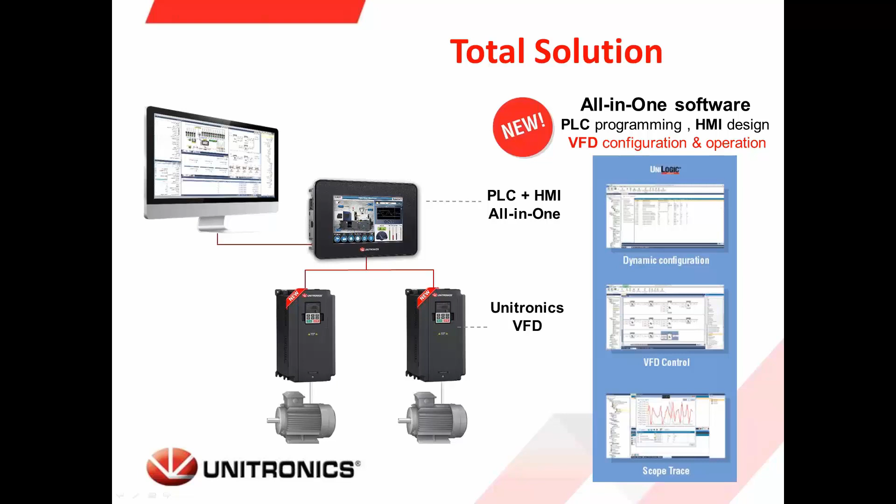In one software environment, we can now program the control code, let's say the ladder diagram, design the HMI screen, and configure and control the VFDs. As we can see in the picture, with UniLogic, for example, we can program the UniStream to configure the Unitronics VFDs and of course control the VFDs, which will probably be connected to motors, pumps, and so on.

Some features of our VFDs. First of all, as I mentioned, you will see later in this webinar how easy they are to program and simple to use. They have built-in EMC filters. Every place you see the asterisk, it is model dependent. We have several mounting options like wall, flange, and DIN rail. The temperature environment can range between -10 to +50, supporting Modbus RTU.

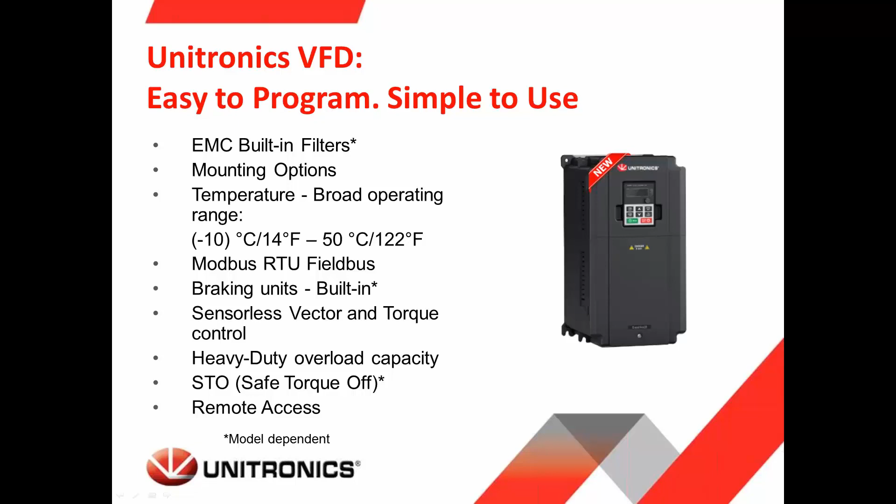Braking units are built in. Of course, as you know, we are not using the VFD for emergency stop. In case you need an emergency stop, you will have to install a mechanical brake. Supporting sensorless vector and torque control. We have a heavy-duty overload capacity; we'll see it in a moment in the specifications. STO, safe torque off, and even remote access via our UniLogic and VNC to the PLC, which will of course be connected to the VFD.

Let's see the specifications. You can see that we have several models. UMI, by the way, is for Unitronics Motion Inverters. We have the B1EU, B1UL, and B5UL. You will see in a moment the certifications for CE, TÜV SÜD, and also for the US market, UL. You can see here the input voltage, supporting different types of input voltage with single phase and three phase. Input frequency 50 to 60.

For the B1 models, the supported motors will be three-phase asynchronous induction motors. The B5 model also supports permanent magnet synchronous motors. The output frequency will be 0 to 400 Hertz. The overload capacity, as we discussed before, can be up to 60 seconds at 150%, up to 10 seconds at 180%, and 1 second at 200%.

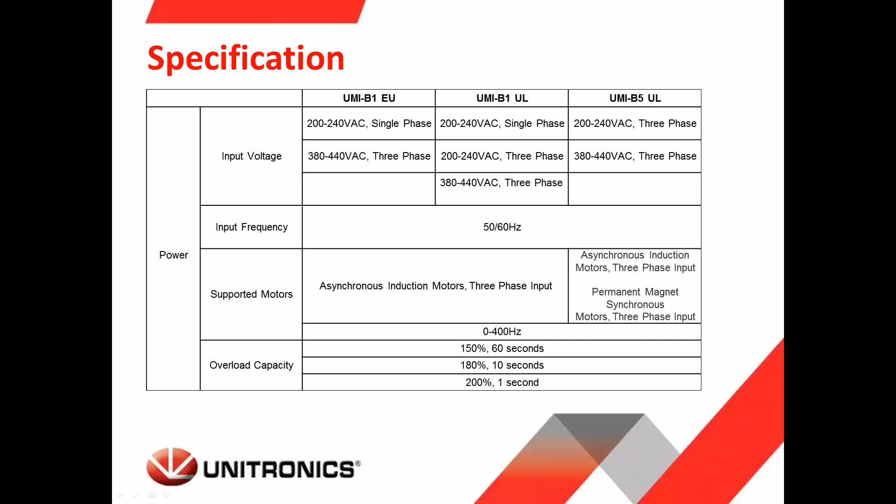Under control, as we mentioned before, we're supporting space vector PWM and sensorless vector. We can control the VFD via Modbus, analog input or digital input, PID, and even high-speed input. The communication will be over Modbus RTU 485. For the number of inputs and outputs, under analog inputs, depending again on the model, we support 0 to 10 volts or 0 to 20 milliamperes, and digital inputs support 4 or 8 normal digital inputs and 1 high speed.

Also supporting analog outputs, digital outputs, and relay outputs. For analog we again have 0 to 10 volts and 0 to 20 milliamperes depending on model. For digital outputs, in the B1 model we have 1 transistor output, and in the B5 we have 2 transistors, one of which is high speed up to 50 kilohertz. Also supporting relays, again the amount of relays depending on the model.

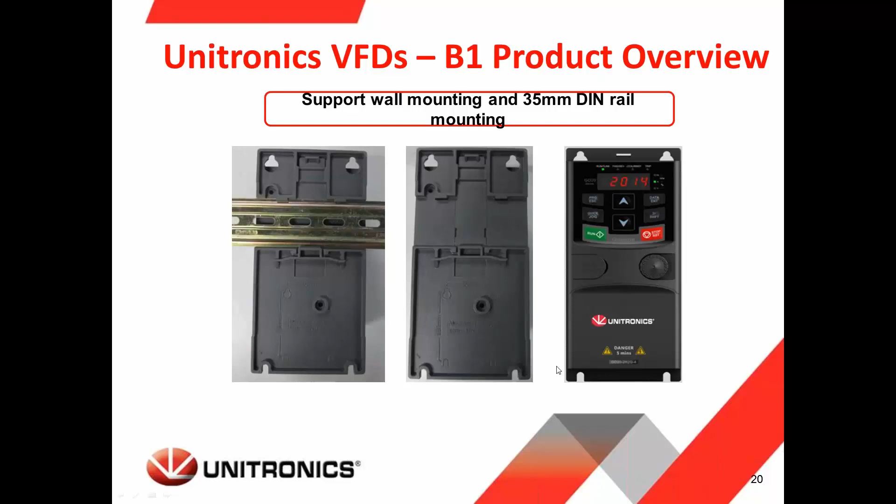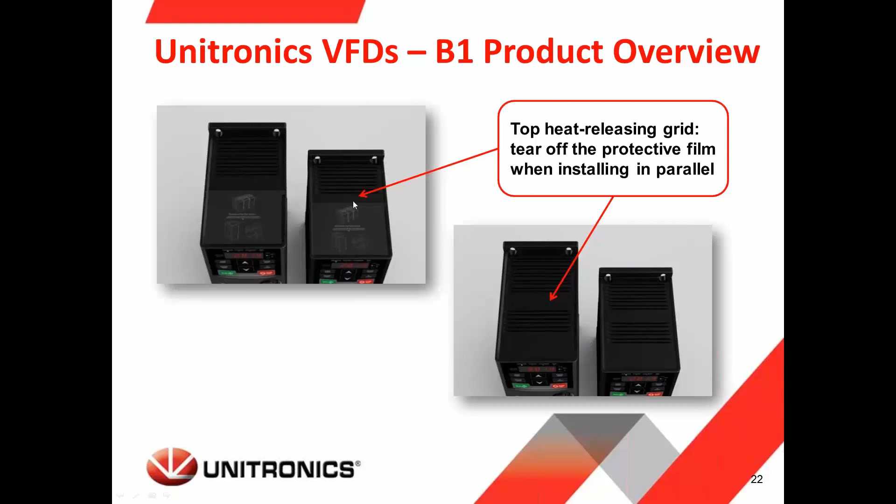And here we have the upper cover, which is dual layer, to expose the terminal blocks for connecting digital, analog, and so on, and also connecting the power and the motor. We support, as we mentioned, wall mounting or DIN rail, as you can see in these examples. You can also connect them on a DIN rail, one after the other. In case of installing one next to the other, there is an option to tear off the protective film for ventilation. And also here we have the option for the bottom heat releasing grid.

In terms of accessories, we support an external keypad, as we mentioned, flange mounting, braking resistors, filters for C3 and C2, and dam-board for side heat releasing holes.

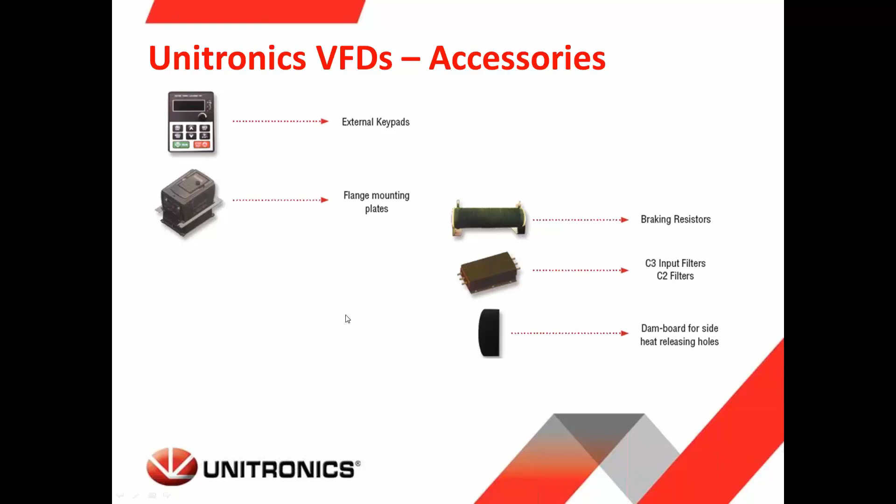In general, regarding safety, when you take the VFD out of the box, one must read all the safety precautions. I just want to mention that the VFD is the first Unitronics product that involves the high voltage grid. It is also mentioned in the manual that after turning off the VFD, you still cannot touch the power area. It's very dangerous because the VFD has DC capacitors, which take at least 5 minutes to discharge. And like I mentioned before, the inverter cannot be used as an emergency stop device. We must install a mechanical brake.

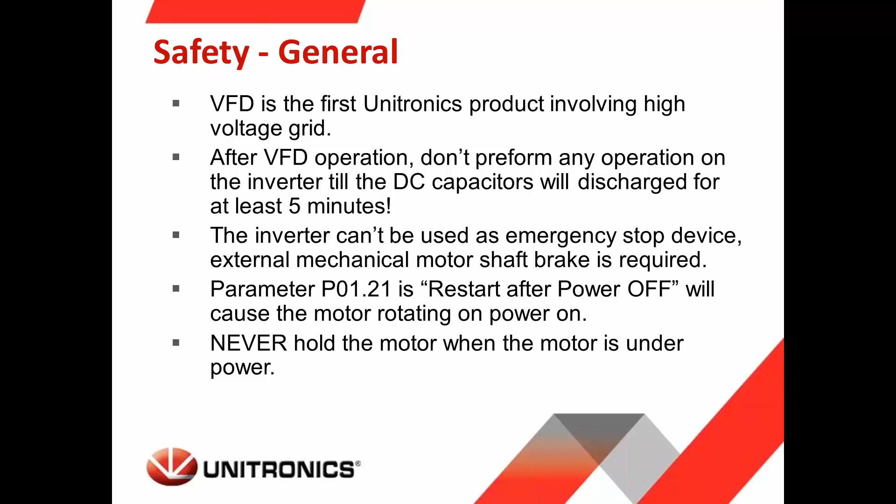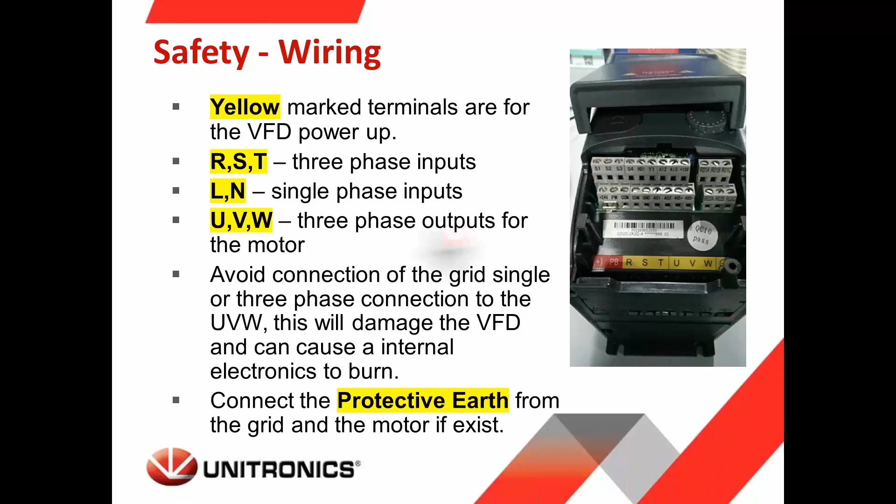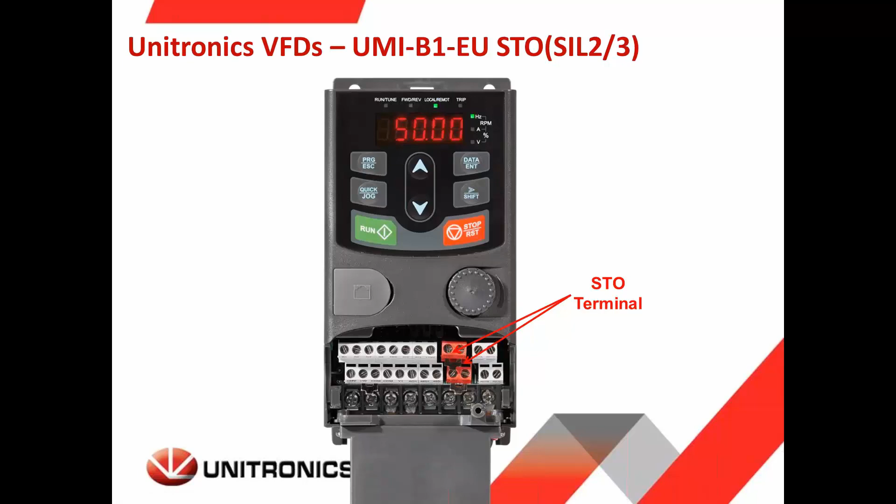We can see it also here in the diagram. Okay, and of course the STO is mostly used for safety. It helps to prevent unexpected start of the motor and also to cut the drive signal in cases where a human is working next to the motion devices. And let's say when he is crossing some area, we want, of course, to stop the motor immediately. So this is the purpose of the STO, which is SIL 2 and 3.

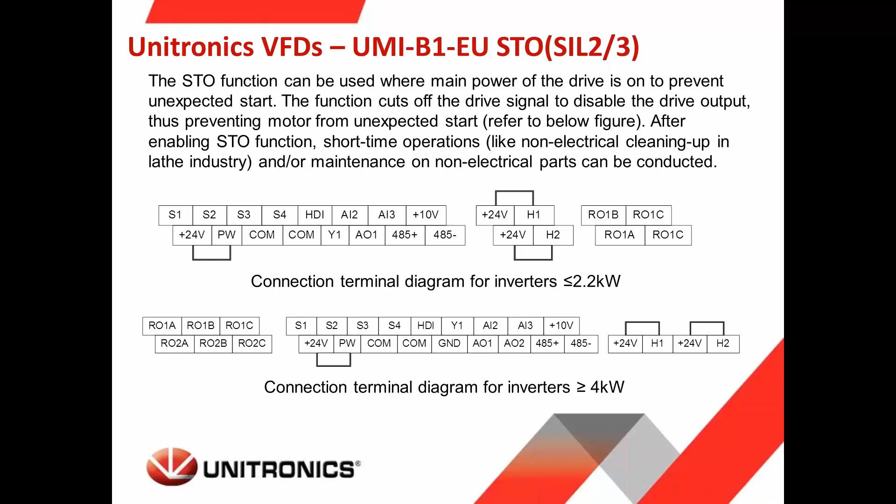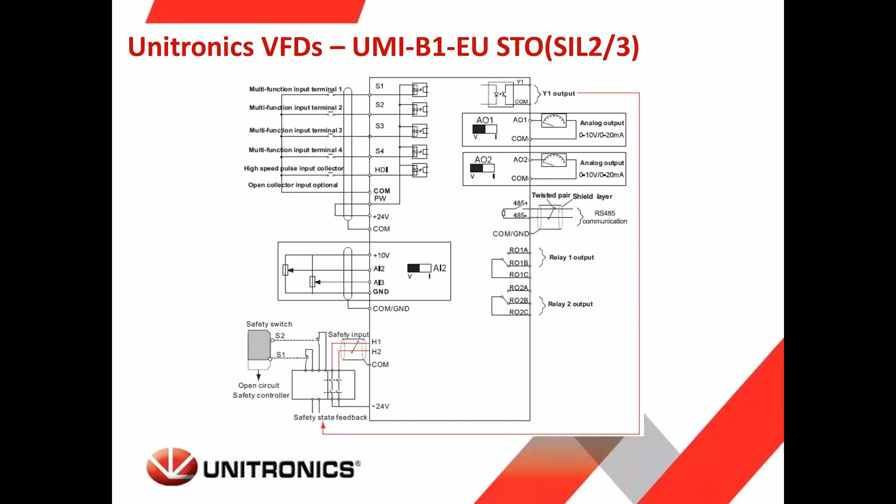Here we can see in the diagram how to connect the safe torque off. Of course, all these diagrams and pictures were taken from the manual, and on our website under the new VFD page you can find all this information.

If we are talking about operating using the keypad, here using the program and escape key we can select the program number, and using the enter key we can change the parameters using the up and down arrows, and also using the shift we can move between the digits when we want to change the higher numbers of the parameters. Run and stop if we are going to control the VFD from the keypad, and also an option for jogging via the keypad.

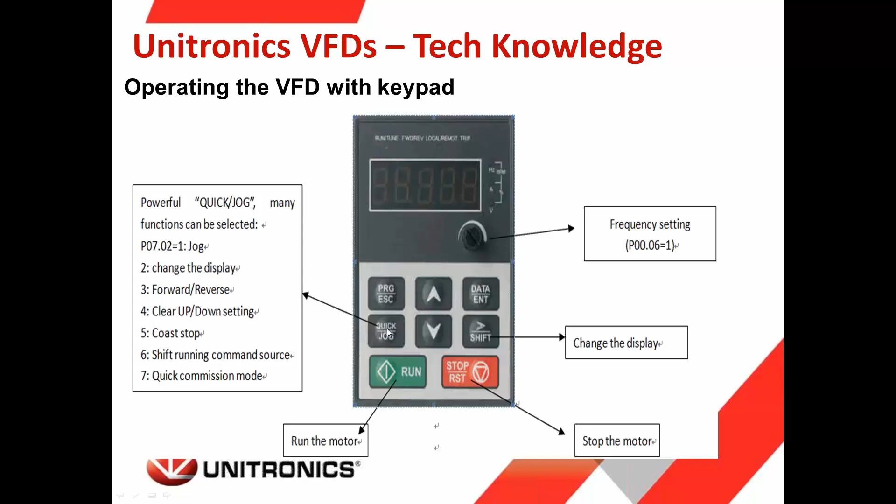Now in the next slide we'll see several examples for configuration. In general, as you know, when you are using a VFD, the first thing you need to do is to configure the motor parameters. The motor parameters will be in group number 2. You can see that the parameters are split into group and index.

Okay, so let's say this is group number 2, and here we need to configure the motor power, frequency, speed, voltage, and current. As you know, on the motors you will have a plate, and on the plate you can find all these 5 parameters, and you need to set them in order for the inverter to move the motor with the best performance.

And here these 2 parameters: 0001 is the run command source. The source of the run command, meaning to start the drive, can be from the keypad, it can be from the terminal, from the digital inputs, and it can be also by communication via Modbus.

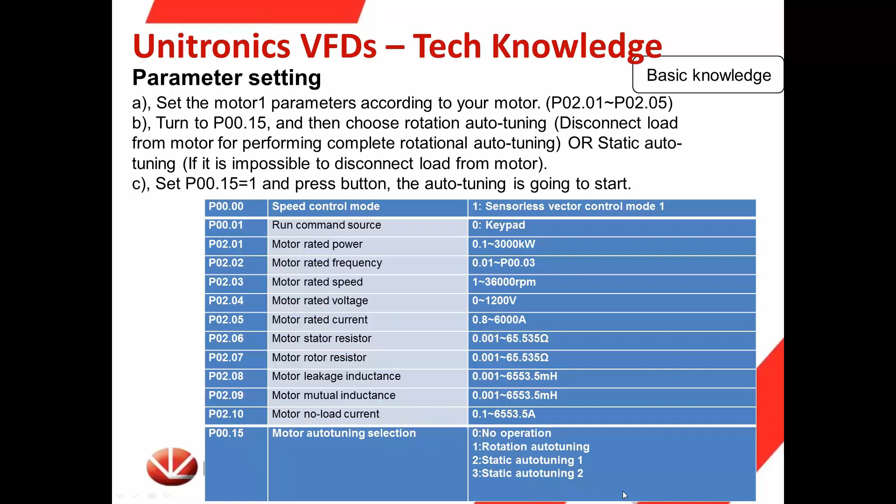We can see here in parameter 0015 we can activate the auto tune. There are 2 types, actually 3 types of auto tuning. The first one is called rotation. Rotation auto tune means that we are performing auto tune when the motor is not connected to the load, which is recommended. If we are not able to disconnect the load from the motor, we will use the option for static auto tuning.

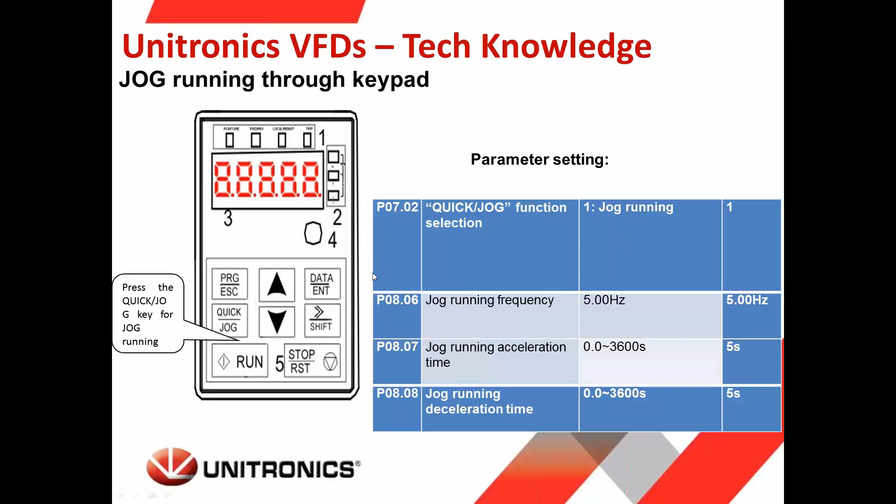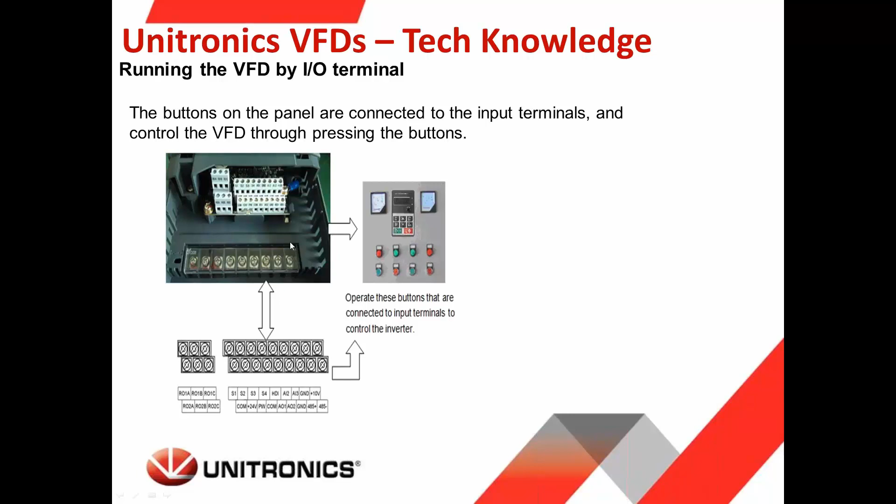Here we can see again just an example of the terminal, if we want to control the VFD via the terminal block, via the inputs, for example the digital and analog inputs. This is an example of 2-wire control mode to control the VFD via digital inputs. So we can see here that we can configure S1, which is the terminal for input number 1.

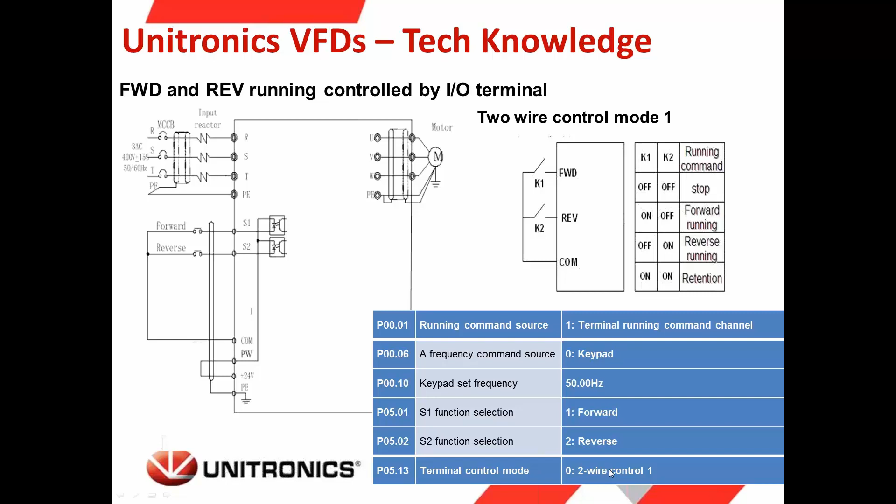We can configure it to perform forward, so that means that when I apply 24 volts or 0, depending on PNP and NPN, on this input, the motor will start running forward, and I can do the same for S2, which is terminal number 2, for reverse, and the mode, which will be if I want to use 2-wire control, and then I can use this method.

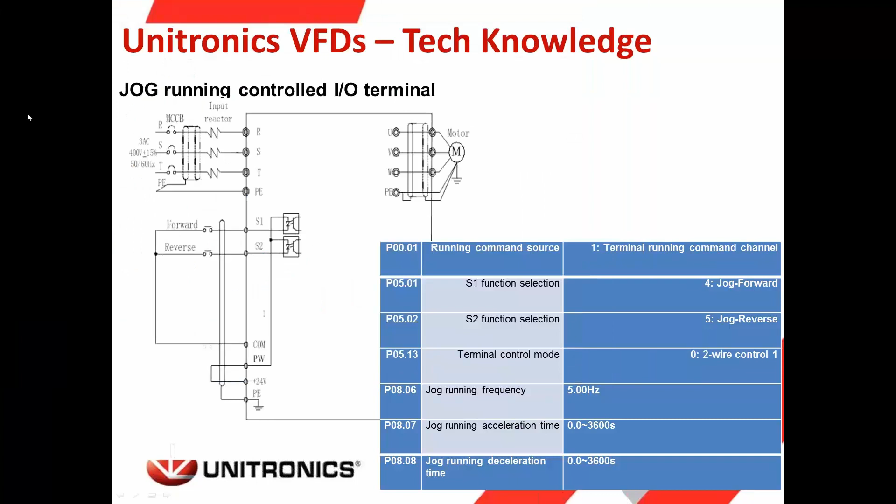You can see also jogging via the I/O terminal. So again, you can configure S1, this time to perform the jogging. I can just show you in the user manual, you can see here, this is how to configure the digital inputs, for example.

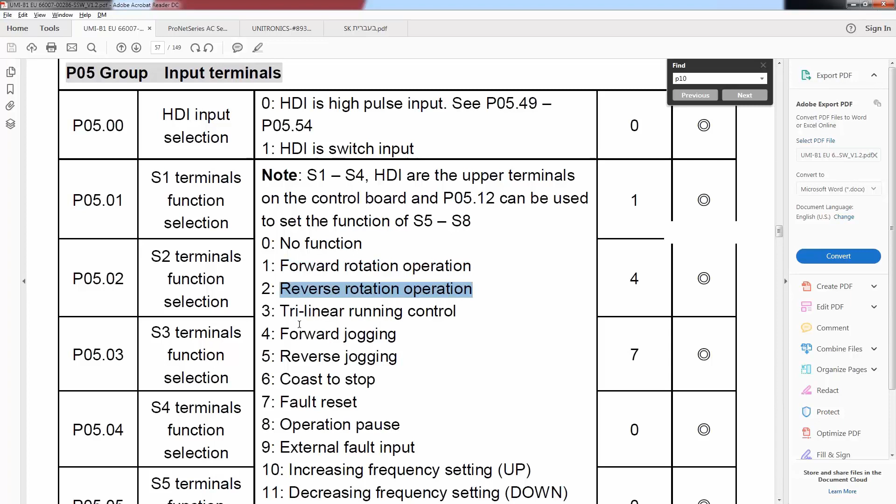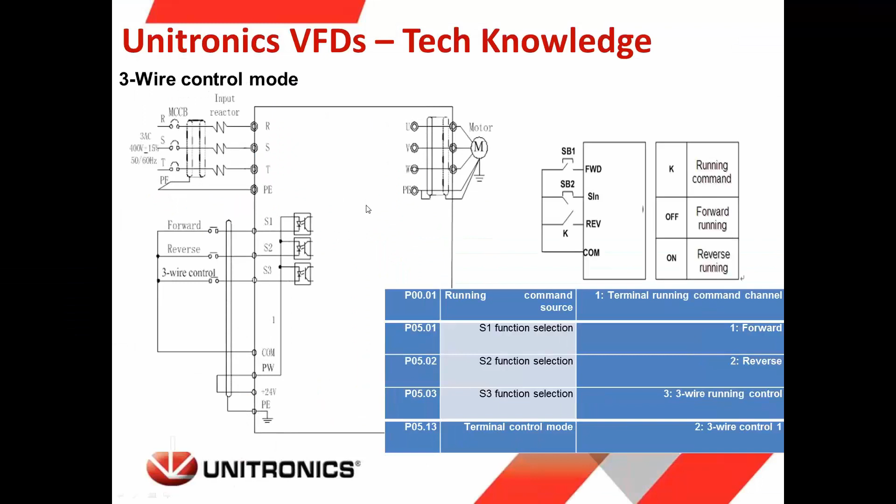So you see number 1 is forward, number 2 is reverse, and so on, jogging, fault reset, and you have here many options for configuring what each one of the inputs will do. Again, this depends on the application. Of course, everything can also be done by communication if you don't want to use the terminal. This is another option, a 3-wire control mode.

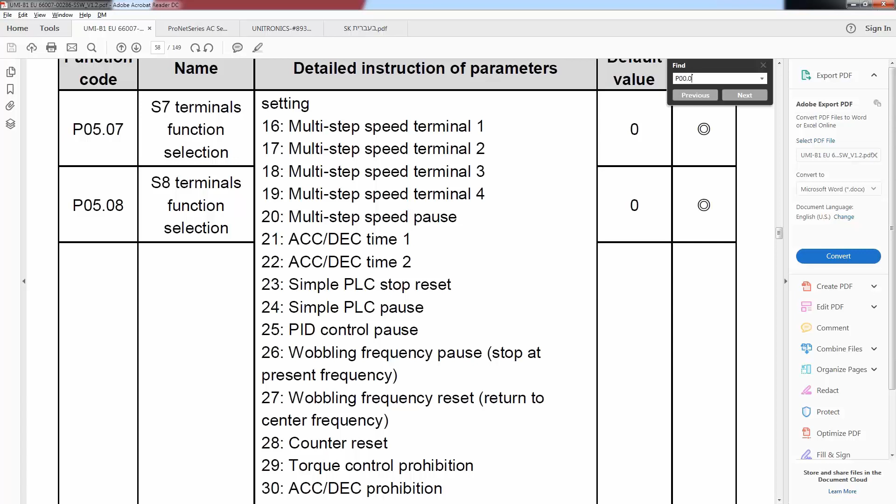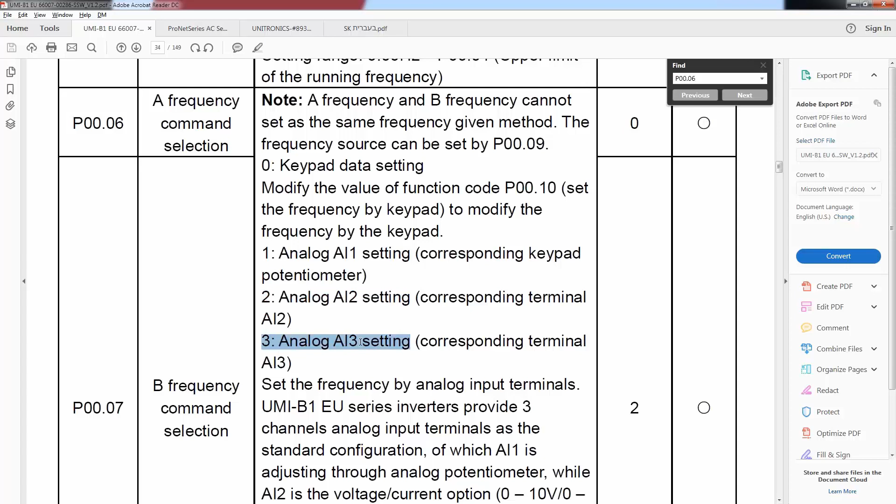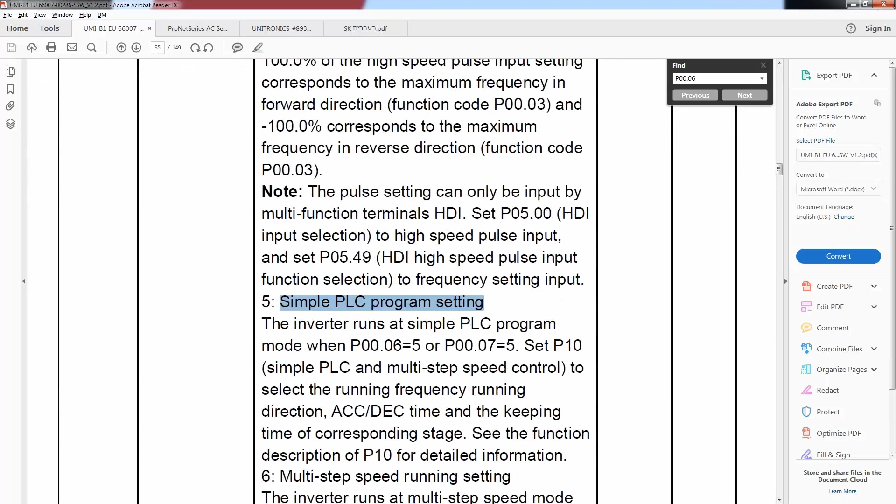Again, if I go back to the manual, to parameter 006, you can see here, this is the definition. 1 is analog input number 1, which is the potentiometer, 2 means analog input number 2, 3 number 3, 4 is the high speed, 5 is a simple PLC program if you want to do it by the digital inputs, 6 is the multi-step speed, and so on. So there are several ways to set what will be the source of the frequency.

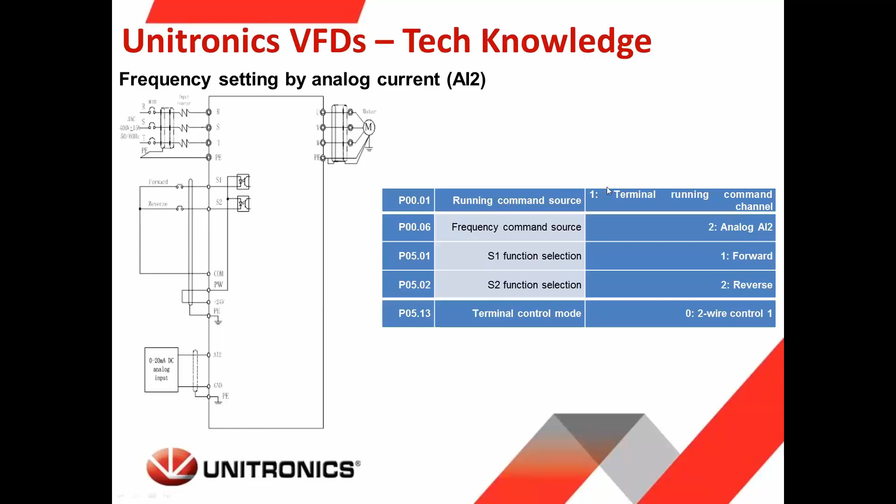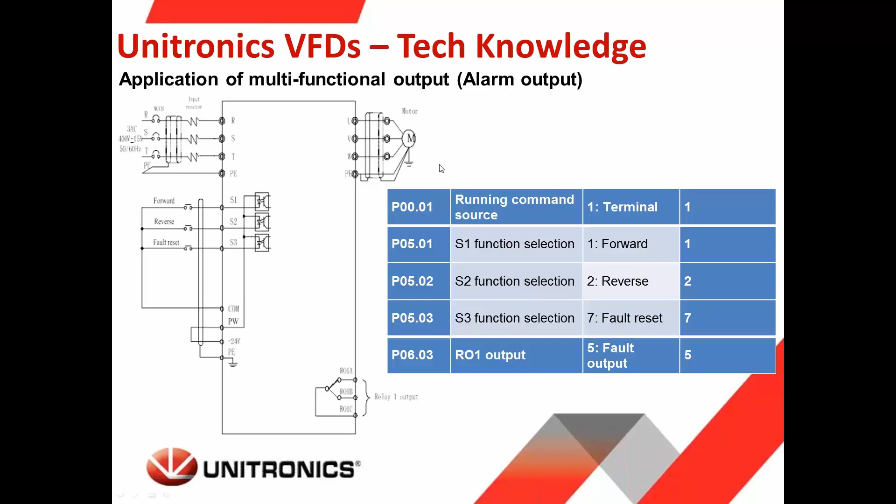In the PDF, in the user manual, you can also find all the fault diagnostics. So in case the VFD goes into fault, you can see here the fault code, which will appear on the screen of the VFD, and we can find what is the possible cause and what can be the solutions. Okay, so these are the fault diagnostics.

And so this is an addition from Unitronics to allow OEMs to simplify and centralize their control needs, relying on fewer components from fewer vendors. They now can save time, budget, and efforts with this all-in-one approach. As you will see in a moment when we review the software, everything can be programmed in one environment. So let's now jump directly to UniLogic.

Okay, so I just opened a new application. In a moment I will also open some example applications. We already published in our support portal examples and some information about the VFDs. Also, as I mentioned, on the website you can find the user manuals and all the marketing information.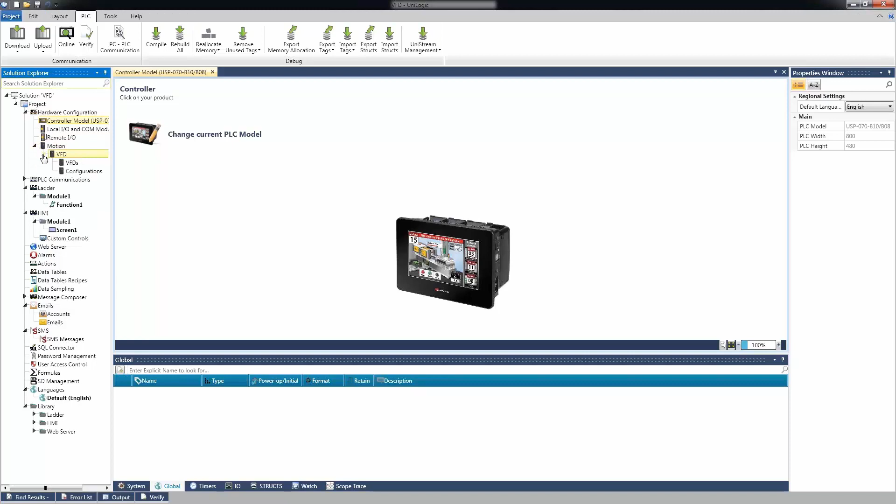Now, when we open a new application in UniLogic, we have a new section under the hardware configuration, which is called Motion. Under Motion, we have VFD, and here you can find VFDs and configuration. So first of all, when I go to VFDs, here in the toolbox I can find the families. So let's say I will take this one. Again, on the VFD you will have a sticker with the model. By double click or by drag and drop, we can add the VFDs.

The communication channel in our PLCs will be the port on the CPU, or if we are referring to UniStream 5, it will be one of the RS485 ports that you install. So in communication channel, we have to define where the VFD will be connected. I will go first to PLC communication, physical, serial COM. And under the serial COM here, I will first check the VFD.

By default, the baud rate is 19200, 8, even, 1. This is because when you take the VFD out of the box, these are the default settings. If you want to change it, of course, you can change it via program number 14 in the VFD. So you can select here the baud rate, parity, data bits, and so on according to what you configured in the VFD.

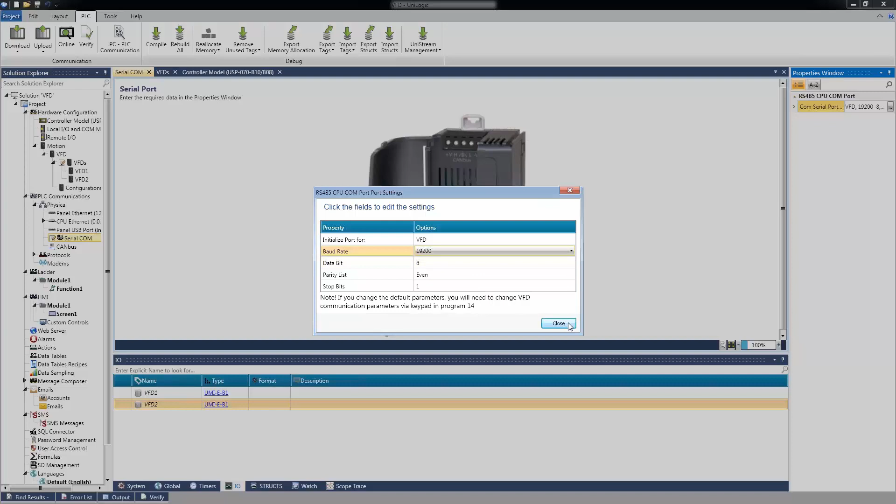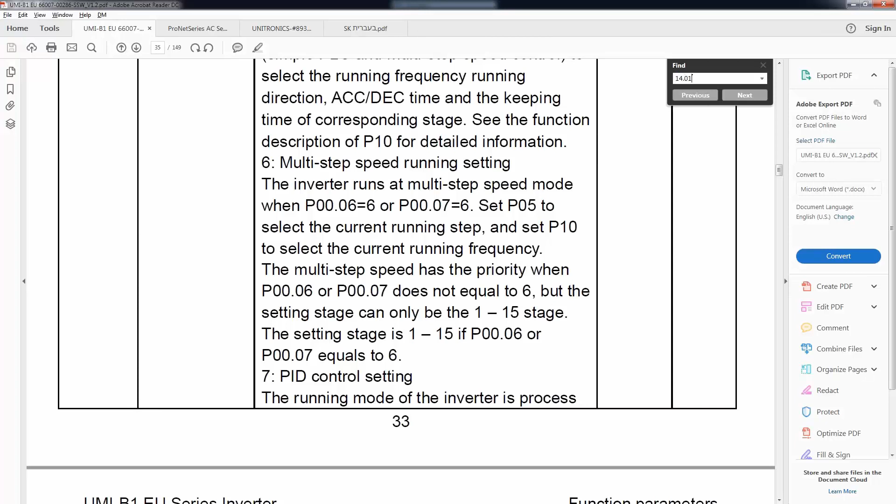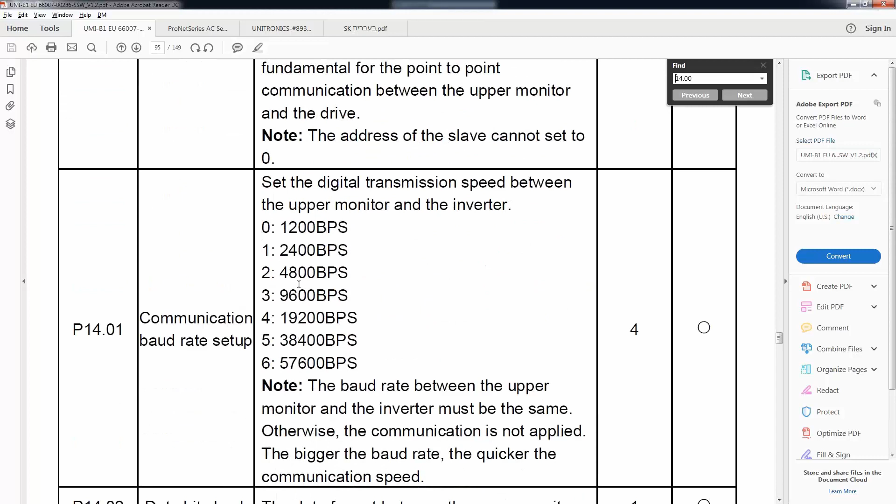Now if I'm back here, I can select the communication channel for each one of the VFDs. Here we can set the Modbus ID. Of course, the Modbus ID can be determined also in the VFD, I can just really quickly show you. If we go to program number 14, in 14.0 this is the slave ID, 14.1 the baud rate, 14.2 the parity, and so on. Start bit, stop bit, and so on.

Okay, so once we configure the VFDs, the next stage is to create the configuration. So we go to the configuration, and here we need to pick the model. In my case, I will pick, for example, the 1.5 kilowatt model, again by double click or by drag and drop. So we can see here the model, and here the configuration. Here we can determine the configuration of the VFD.

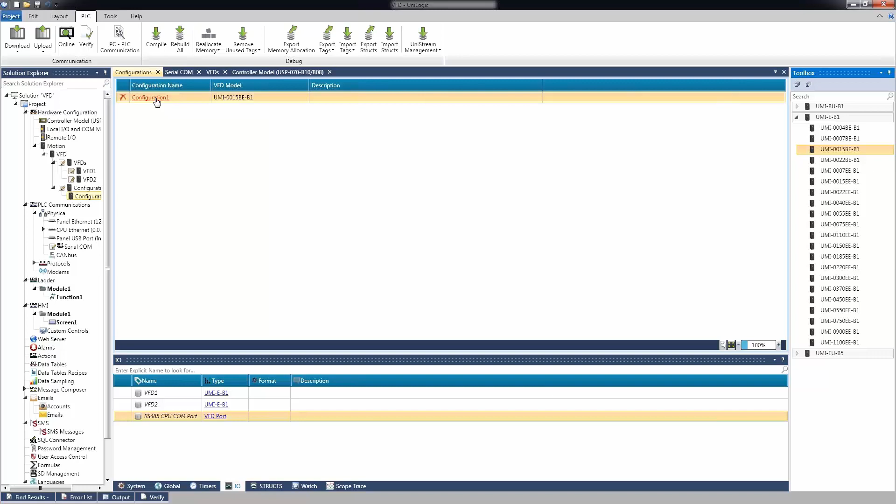So if I click on it, I will get this grid. Let's take a look at the grid. You can find in the grid the function code, same as it appears in the keypad, the name, and the configured value. Here we can determine the value that we want to configure for each one of the parameters, minimum and maximum, the default value, and of course units.

Here on the left, you can see all the groups. We added, for your convenience, two groups which are called Fast and Modified. Let's see what they mean. In Fast, we collected the most common parameters which are used, including, for example, the speed control mode, the run control mode, the frequency, maximum frequency, upper and lower limit, acceleration, deceleration, jogging, and so on.

Then later on, if you go to each one of the groups, you can define here, let's just take an example. Let's say I want to configure my speed control mode to V/F control. I want the run command channel to be by communication, and let's say the maximum frequency will be 60, for example. Each parameter that I'm going to change will appear immediately under the modified parameters.

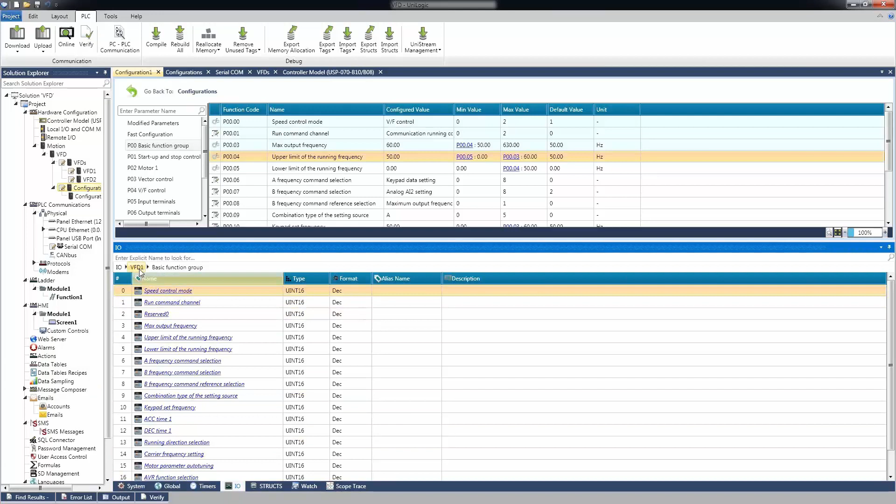We can see the line and model, and we have all the rest of the parameters as arrays inside the struct. For example, you can see the basic function group here. We can also find everything here under the array. The speed control mode, so we can see everything here also inside this struct.

Now let's take a look at the ladder elements that we have to control and configure the VFD. We can find the ladder elements here under COM VFD. Here are the elements. Let's say we want to load the configuration to the VFD, the configuration that we made in the grid. We have two options to do it.

If we want just to download the modified parameters, we will take this option, VFD Write Modified, and the input will be which inverter I want to download the configuration to. Let's say in this case I will select VFD1. And the configuration name is Configuration 1. It can also come from a tag, or I can just write here Configuration 1.

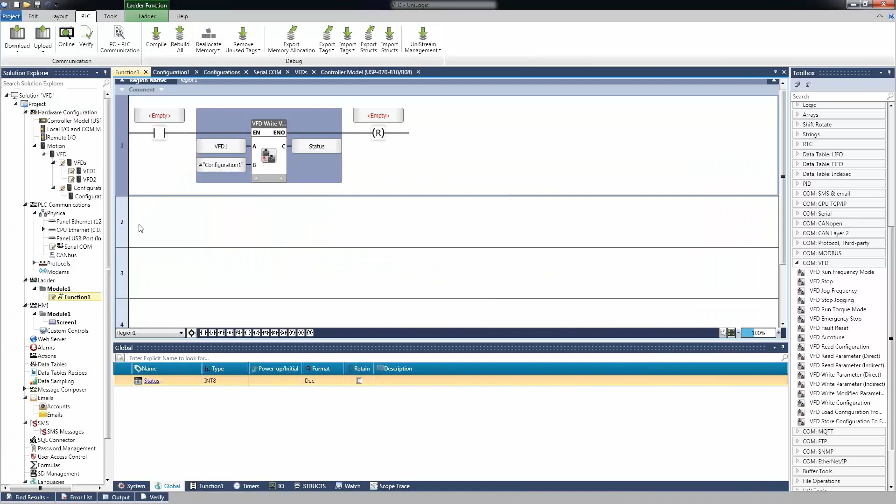And this is just a status. You can see here all the statuses, whether it was successful, and if not, what the problem is. This is how to write all the modified parameters that we configured here in the grid. Only these ones will be downloaded to the VFD.

Because let's say someone made some change in the keypad and you don't want to overwrite the configuration that was done from the keypad, you just want to download the modified ones, you can do it via this block. If you want to download everything, the whole configuration, including even the parameters that you didn't change, then this can be done in two steps. So let's see how it's done.

Okay, so first what we need to do is use the load configuration. When we download the application to the PLC, the configuration is downloaded as a file into the flash memory of the PLC. No, not to the SD, but to the internal memory of the PLC. And first we need to load the file into the struct. You can see here these are all the parameters, so it will be loaded to the struct.

So again, I just need to select the VFD, the file name, so I can, let's say, do the same here. And again, status.

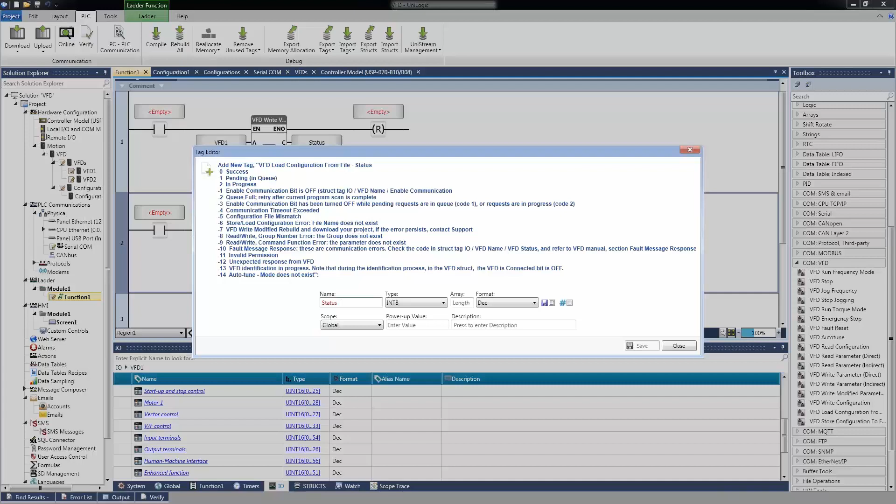Once we loaded the file into the struct, now we want to write it to the VFD. So in this case, we need to activate the write configuration. We have here the option write configuration. So we just pick the VFD and that's it. Since we loaded the configuration for the VFD1 struct, writing the configuration will basically write all the data inside the struct into the VFD by Modbus communication, of course.

Okay, let's see other blocks. Let's say that right now I want to read the configuration from the VFD. I just need to select which VFD I'm reading. Once I perform this read, all the data will be inside the struct. So let's say you configured everything from the keypad, but you want to read it into the PLC and see what the parameters are. You can activate the read and see them in the grid.

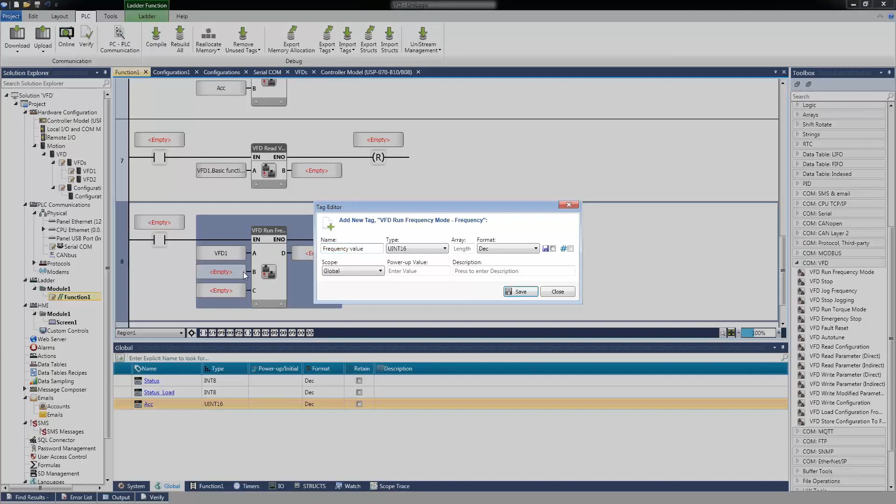For example, I can say here frequency value. So here you can set the frequency. By the way, the frequency is in hundredths of hertz, so for 100 hertz, it will be 10,000. Input C is the direction, 0 for forward and 1 for reverse. Again, it can come from a tag. Let's say I want always to move forward. D will be status. So this block is for running the VFD.

Let's take a look at the next one, which is stop. Very simple, just a block, select the VFD you want to stop, and that's it. We have several types of stop. This stop, of course, stops according to the deceleration. And we have the stop emergency, which will immediately disconnect the signal to the motor. But as I mentioned, because of inertia, the motor will probably rotate a little bit more. If you want to stop immediately, you'll have to use a mechanical brake.

Let's see some more options. So we have here the fault reset. In case the drive goes into fault due to over voltage, over current, many kinds of faults, you will not be able to run the drive until you reset the fault. So this is the block to reset the fault. The only input is just to select which drive I want to reset the fault.

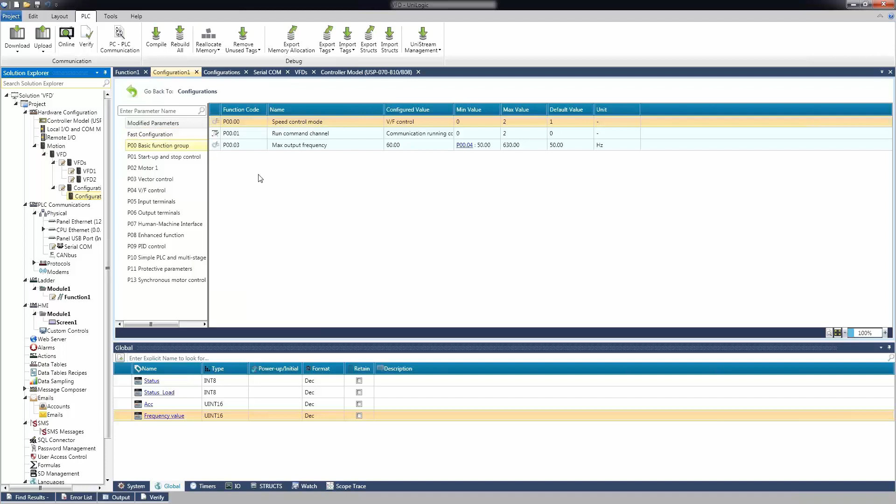I think here under the fast configuration, you can see you can configure the jogging run frequency, the acceleration, and deceleration. So once you activate the block to start jogging, it will jog according to the frequency, acceleration, deceleration determined in the configuration. And of course, the next one will be the stop jog, which is probably very clear, just to select which one I want to stop jog.

So we are left with the torque mode. Okay, we said that we can also control the drive by torque. So let's see what are the parameters for torque. So first we select which VFD we want to run as torque. Parameter B is the torque value, which can be from minus 100% to plus 100%. So this will be the torque value.

And parameter C, which is the forward rotation frequency limit. We can limit the frequency. So let's say I want to use 50% torque, but I still want to limit it, let's say, to 20 hertz. Then I can set it like this. And also for the reverse. Let's say also for the reverse, I want to limit to 20 hertz. And the status.

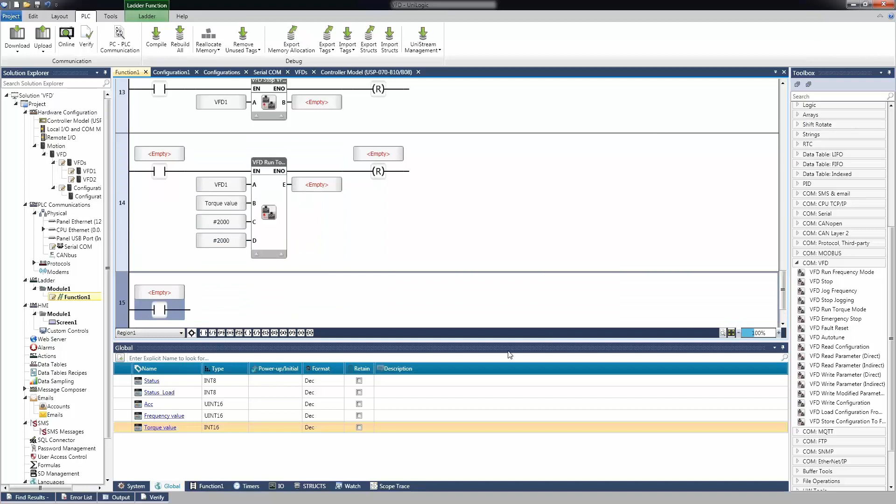And the last block, this will be the auto tune. As I mentioned, the first time that we activate the VFD with the motor, first we need to enter the motor parameters, and later on, if we want, we can run auto-tune for better performance. So for auto-tune, again, I just need to select the VFD that I want to auto-tune, and in parameter B we can select, as we mentioned before, rotation auto-tuning, which means that the load is not connected, or static auto-tuning when the load is connected. That's it. These are the ladder blocks.

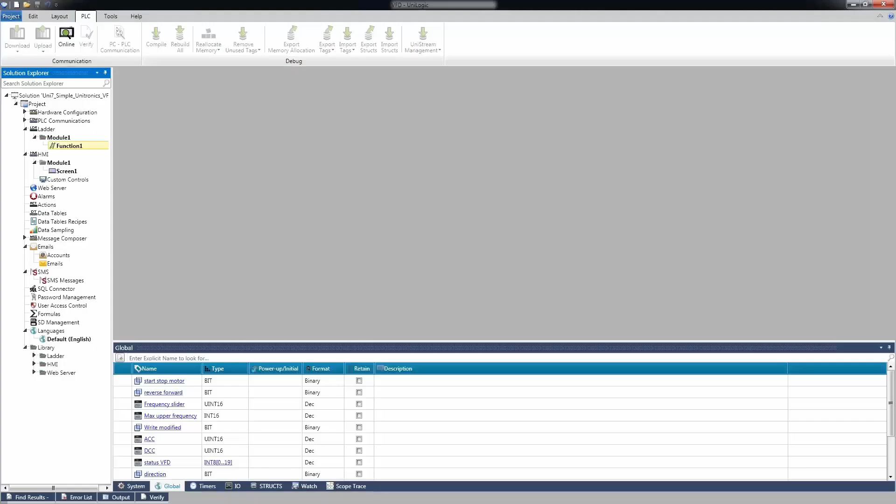Now let me open. We provided basically two examples. One which is simple, which I will show now. A very simple, very nice demo just showing how simple it is to start it, move it forward, reverse, see it in a live trend, the values, and of course also an example for changing a single parameter. So first let me just show you how the HMI looks. So now I'm connected by VNC.

So what we have here in this demo: we can write the modified parameters that we configured, start and stop, forward and reverse, status of the drive, changing frequency, live trend, and changing acceleration, deceleration. So right now you cannot see my drive and motor, but still you can see if I click here on start, the drive went into forward running. You can see also what we are showing here is the voltage,

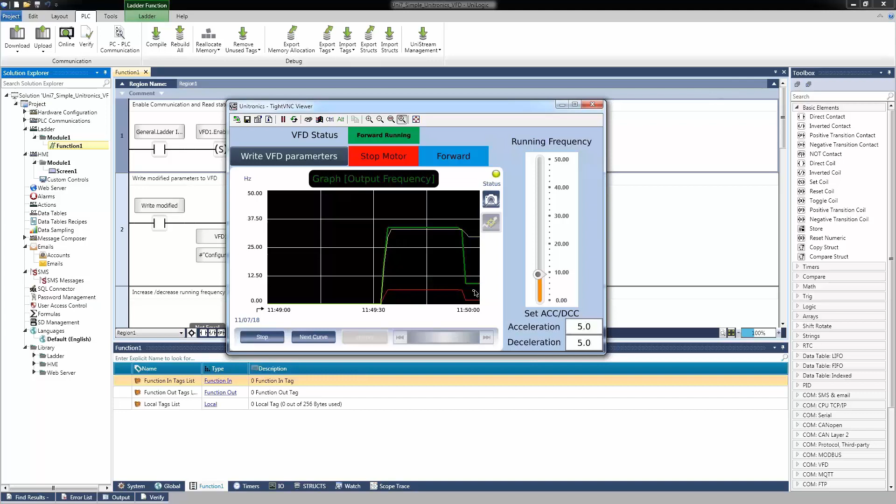current, and frequency. You can see, for example, if we look at the frequency, if I change the frequency to around 10 hertz, you can see how the green line went down. I can change it also, let's put it on 40 hertz, for example, and I can change it to reverse. So you can see basically the VFD decelerates, changes to reverse, and goes back to around 40 hertz.

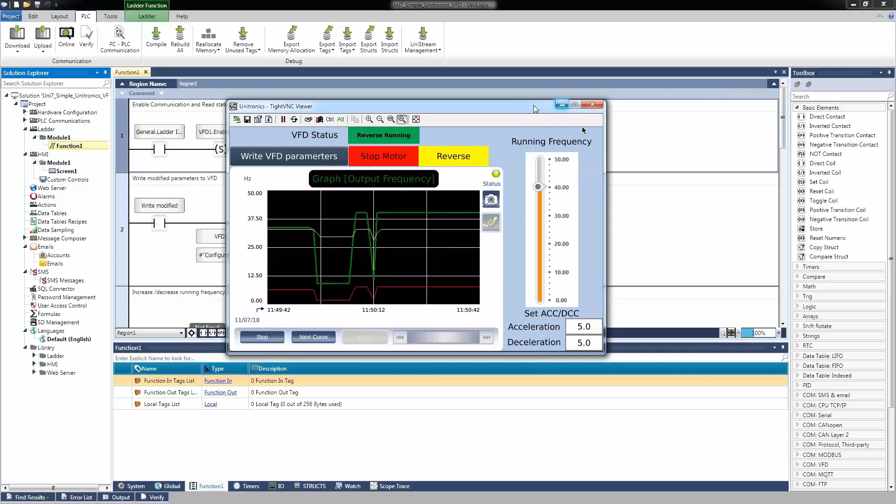From here we can change the deceleration, acceleration, and I want to show you a really nice feature that we released also in this version. We call it the scope trace. So just let me open it here. So the scope trace is basically an option to view the tag values as a graph. It's not limited only to VFD. You can use any tag that you want from the system, not Boolean of course, but integer.

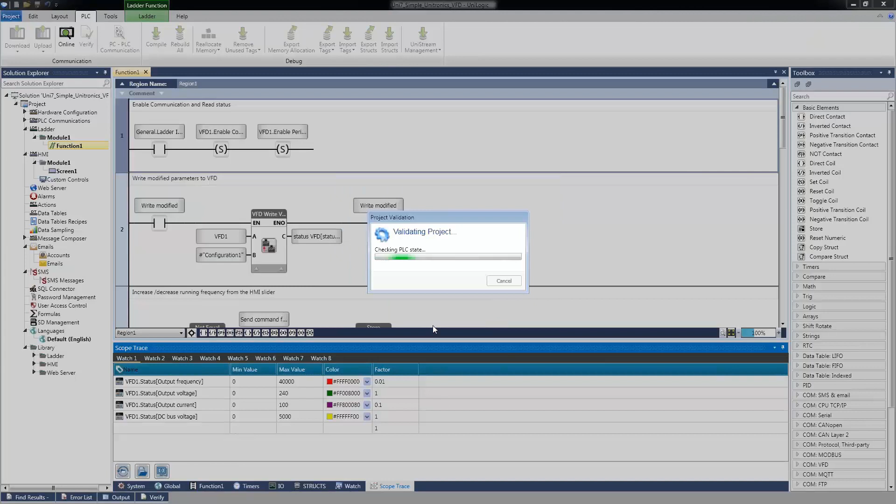And here, for example, you can prepare up to 8 watches. I prepared here one watch with several tags like frequency, voltage, current, and you can define here minimum and maximum. You can define color, and you can define the factor. For example, here I set the factor to 0.01 because the frequency is in hundredths of hertz. And you can see here we have 3 icons. If I click here, it will go online automatically. And once it goes online, you will be able to see the graph.

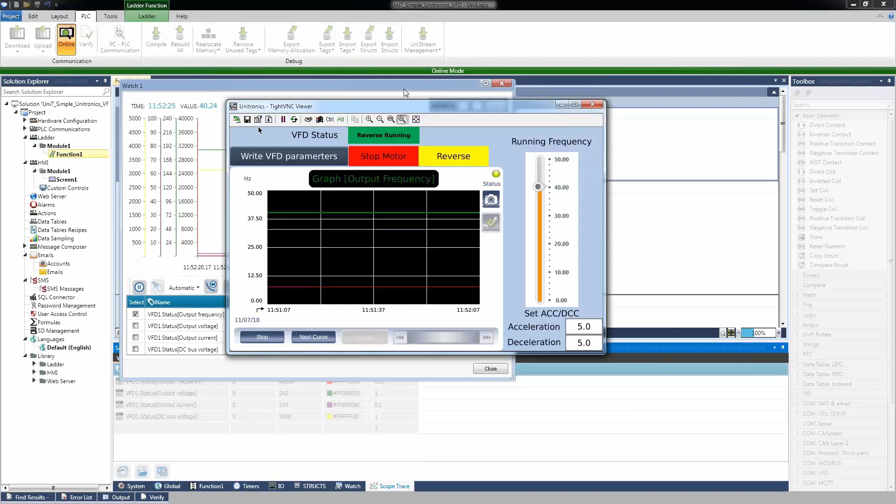Okay, so now you can see this is built in Unilogic, really nice. So let's take a look at the features that we have here. Before that, I just want to show you here, let's say if I'm changing the frequency, you can see it here. Okay.

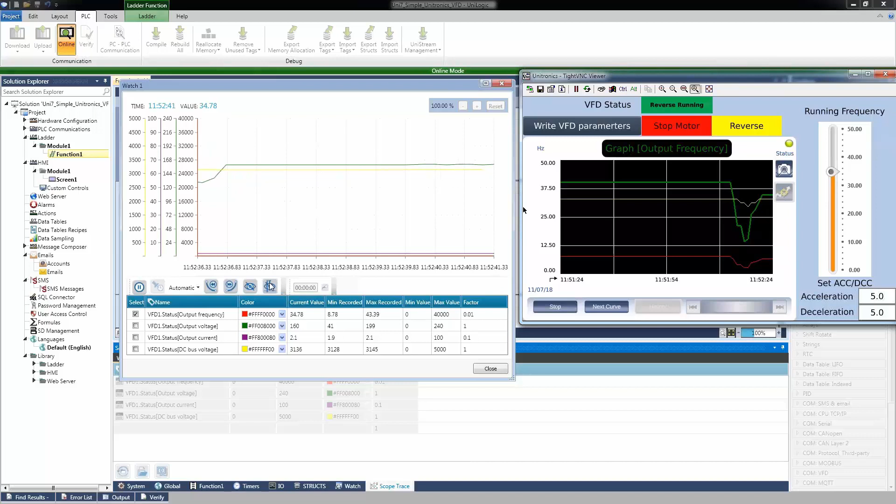So let's take a look at what features we have here. You can see that you can select which curve. This one moves, you can see the checkboxes are changing. I can change the selected curve. I can, let's say, hide, because here you can see all the 4 y-axes. I can hide, and I want to see only the frequency y-axis, or show all of them. I can hide all but only the selected.

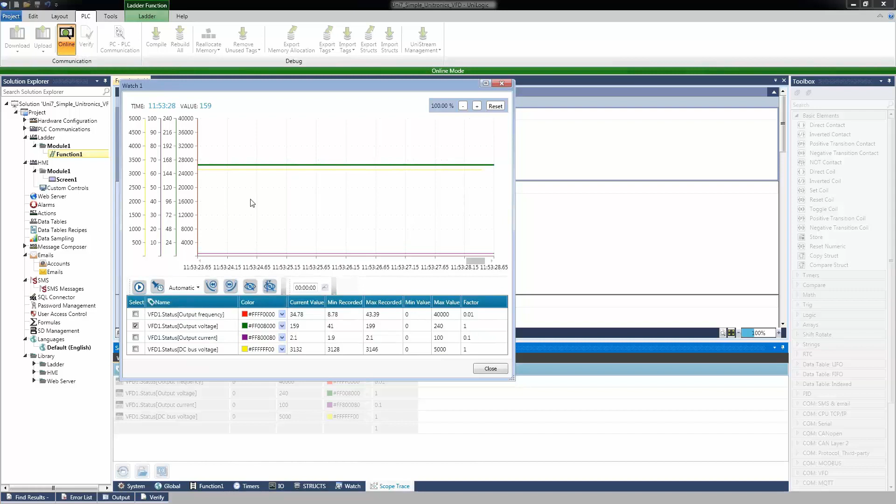Here under the option, by the way, you can see here the current values. Okay, the min recorded, max recorded. You can even, let's say, pause, go back. You have also the scroll bar. Let's go to a nice place like this. And you can see here also you can zoom in and zoom out inside the x-axis.

You have the option for pinning. So I can pin the time slice. So you can see when I mouse over, you can see the blue dot. So I want to see what was the value here, here, and here, and let's say here. And then when you click on the play, you will get a table with the times and the values on each one of the points. Really nice option.

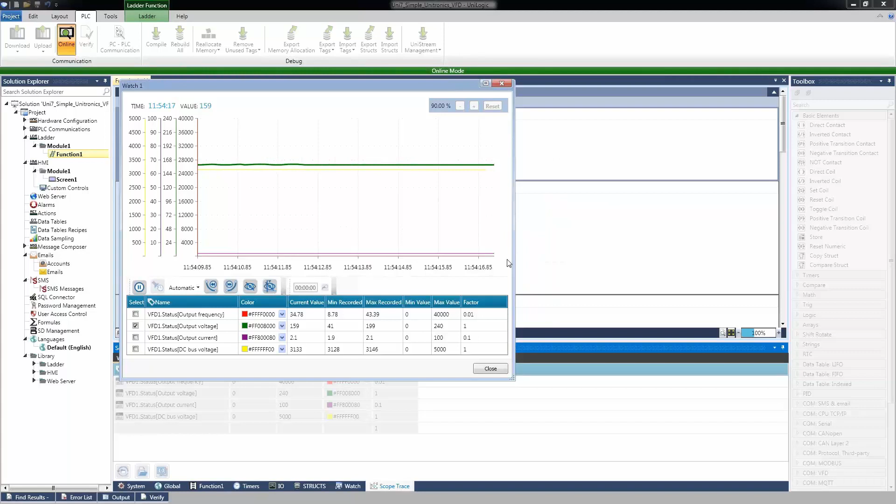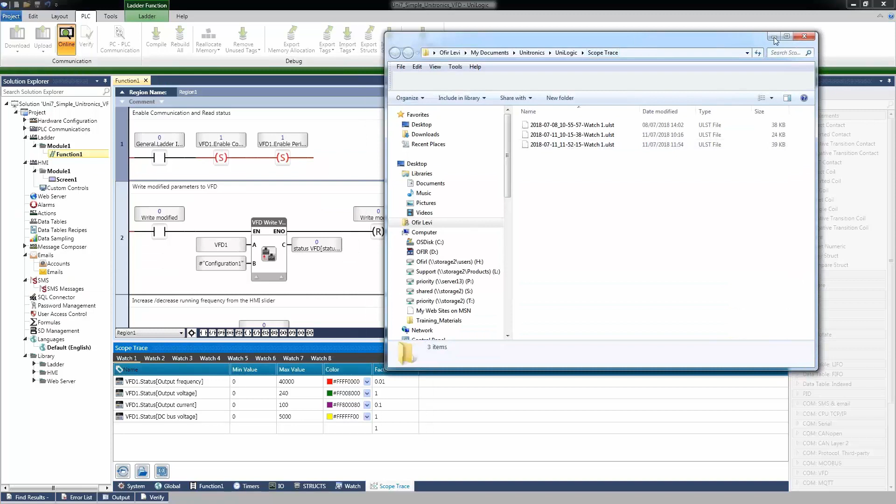And in addition, once you close it, you have the option also. The Unilogic saves this data also to a file. Here you can open and view the files that were saved. And using this icon here, open history, let's open the one that we just recorded. So I just double click on it. And here it is. So also we can scroll and see the data.

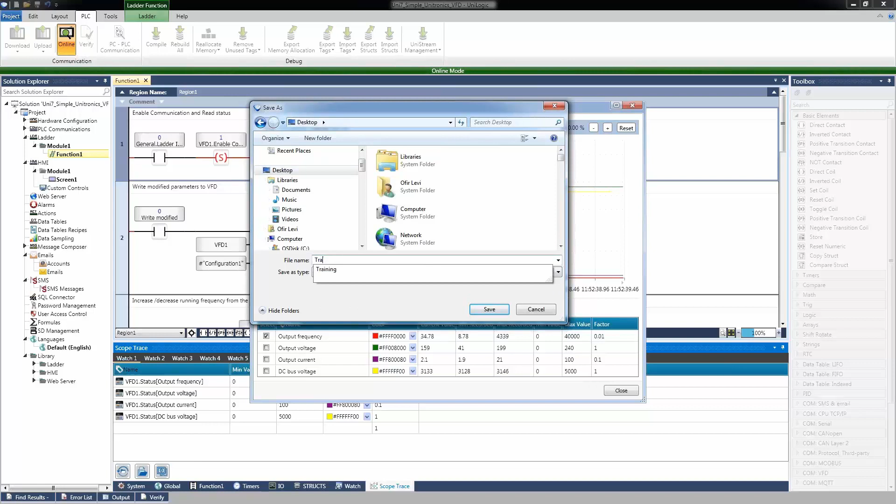And we can also export it to Excel. So if I export it to Excel, let's say I will save it on my desktop. Okay, I will save it to trace. Right, and let me just open it to show you how it looks. Okay, so this is how the Excel looks.

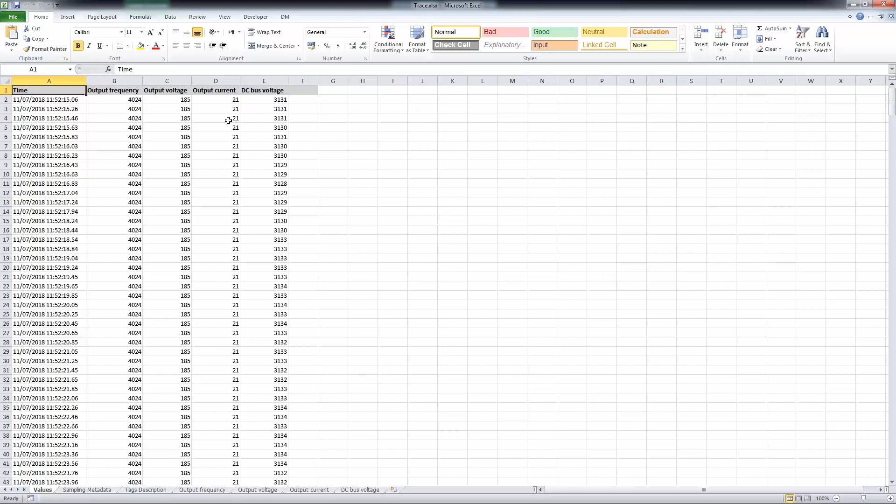So you have the time and the values for all the tags that we recorded. You can see that we have more sheets here, like sampling metadata, which will give you information on the number of tags, what was the first sampling time, what is the interval, and so on. The tags descriptions, and even each one of the tags has a separate sheet to show its values and time. Okay, so this was just a quick one about the trace, but it's a really useful feature.

And this is the application that I just showed you. I just want to show you how easy it is. So here you can see on Power Up Value, I'm enabling the communication and the periodic read for statuses. This is the block to write the modified parameters, and this is the button to write it. Here we have the option to run frequency when we are toggling the start and stop motor. When we toggle it on, it will start. Toggling it off, it will stop.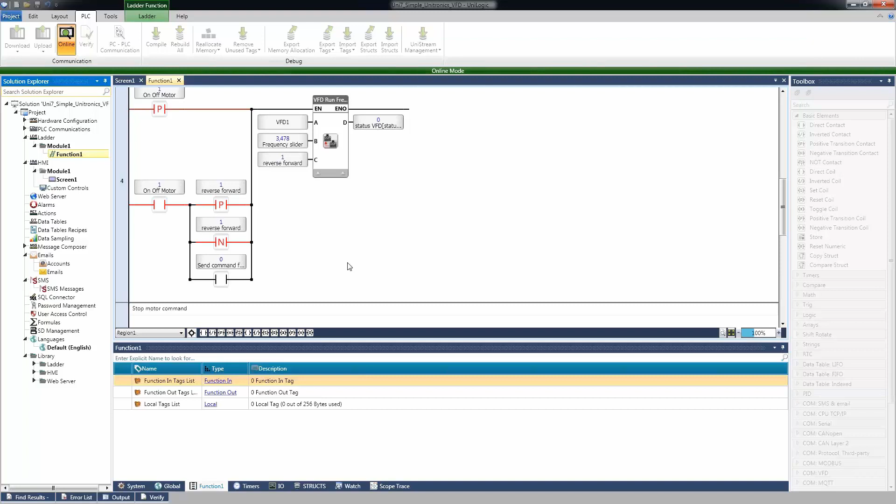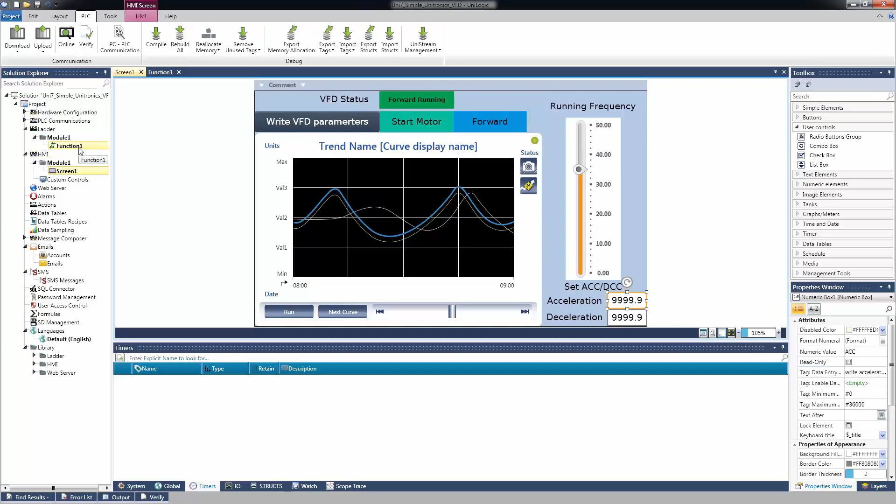And also changing the frequency according to the slider. And also the option to write a single parameter for the acceleration and deceleration. So here we did it on keypad entry complete. You can see here under the acceleration numeric box, whenever tag entry is complete, this bit will be on, and then we will activate writing the parameter to the drive if we want to change, let's say, the

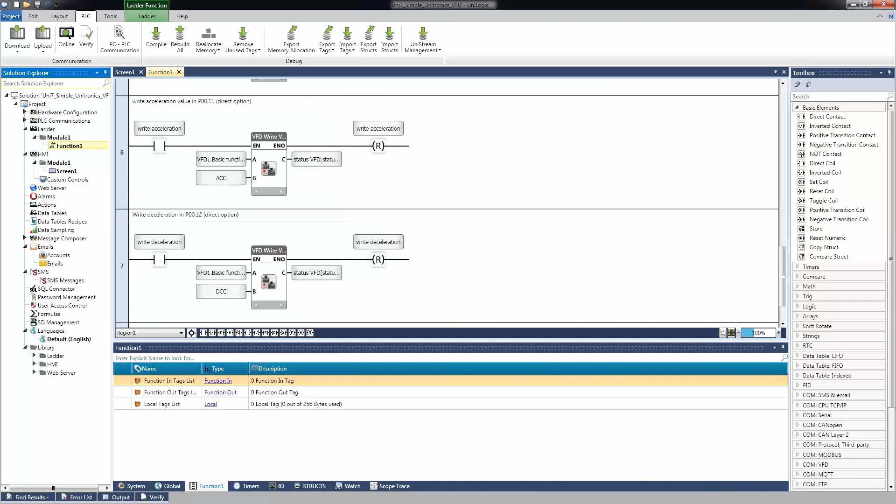acceleration or deceleration. So this is a very simple and nice example for a demo, and we have a much more advanced application that demonstrates all the features, including tuning, including working with the terminals and so on. Okay, so this is in general the